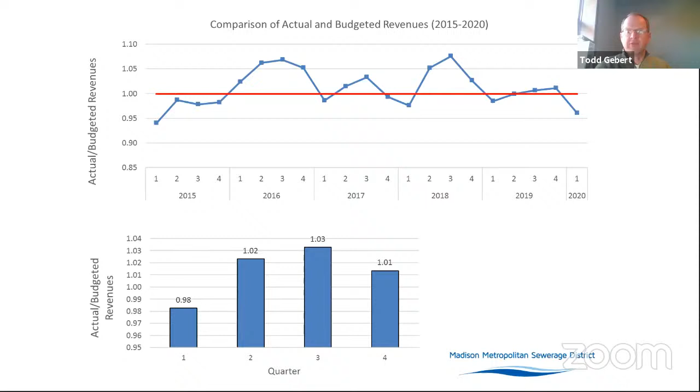That is somewhat rare for the first quarter of any given year, and that's illustrated in this slide, which basically shows over the last 5 years how our collections compare to the budgeted revenue. So in the first quarter, we're usually at about 98% of collections, and it kind of moves up to quarter three as our best quarter for revenues, then tails back down in the fourth quarter. So I think it's safe to say that if you're showing a surplus in the first quarter, you are probably going to show a surplus for the remainder of the year as well.

The main reason for this is, as you may recall, when we set rates for 2021, we didn't know the course of the pandemic at that time. Things were not in a very good place. So we assumed that loadings in 2021 would be very similar to 2020, notably quarters 2 and 3. We made pretty drastic reductions in loadings, and that results in the surpluses you see here because loadings have actually increased, and I'll get to that in a little bit.

The second story, of course, is volume is trending the other way as it normally does in the first quarter. We've had 6 months of pretty dry weather, so we're a little behind on volume so far.

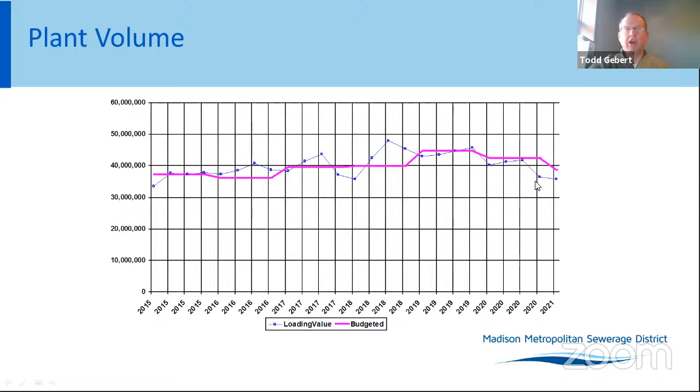So I mentioned volume, and here's the plot we show at rate setting every year. The magenta line is the budgeted flow rate that we're setting, and the blue dots are the actual flows. So you can see back in quarter 3, right here, when we set the budget, we dropped it 8%, and the flows have actually gone even lower than that since then.

One thing to note here is how we set the flow rate. There's a number of things we take into account, but one of them is for the next year, we try to set the flow rate about 2 million gallons per day higher than what we think it'll be in December.

Back in October of last year, we thought the flow would get down to about 38.5 MGD, so we set the budgeted flow rate for the next year at 40.7. You see it's dipped a little bit below that, but not horribly so.

The other thing to note here is that this is not unprecedented. Back in 2018, we had a similar low flow rate of 36.7 MGD. And of course we all know what happened in 2018 with the storms in August, that we actually had a surplus in volume for that year. So I think volume's in decent shape.

One final thing on this slide with respect to volume is you see the choppiness, and obviously that's a wet weather component, inflow and infiltration. You'll note the next item on the agenda is a talk about inflow and infiltration and how the district deals with that going forward. While the district doesn't have a huge problem with I&I, controlling that will help with billing, reducing some of the sensitivity in this volume parameter we've seen over the years. So that's setting the stage for the next agenda item.

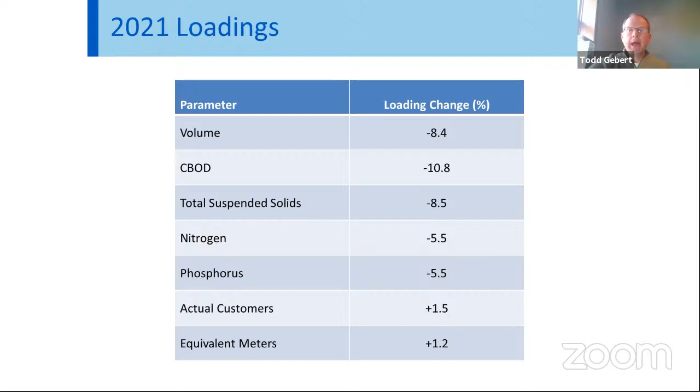Turning now more to the pollutant loadings, this is just a summary. Again, I noted the reductions we made in loading estimates from 2020 to 2021: volume 8%, CBOD 11%, solids 8.5%, and nitrogen and phosphorus both 5.5%. Those are pretty big swings.

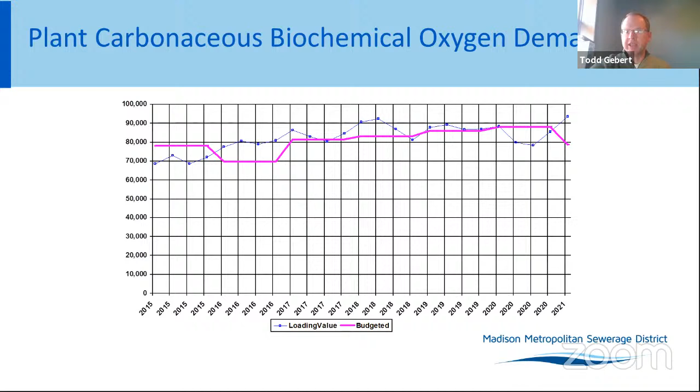You see a similar story for total solids, very much the same pattern. And even plant total phosphorus, which tends to be our most stable parameter with very little fluctuation quarter to quarter and year to year, even that has rebounded in quarter 4 and into quarter 1.

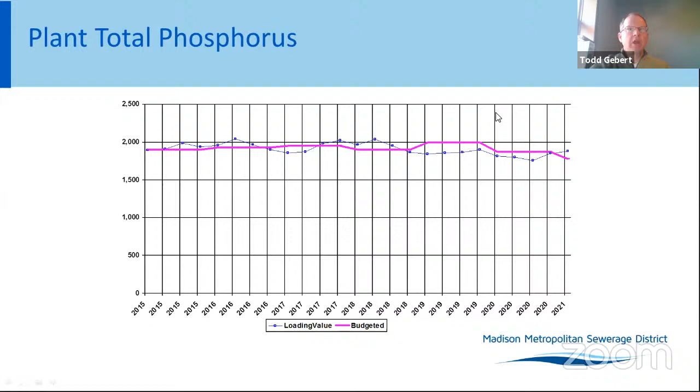So you might be asking, what's driving this, or where is it coming from? We didn't see this increase in any of our local monitoring points, the municipalities that we monitor. Just as a refresher, we monitor every customer except the city of Madison, which is figured out by difference, but we didn't see it in any of the customer communities. We do, however, monitor CBOD and other pollutants at the pump stations that pump to the plant.

Looking at that data, you see pump stations 8 and 11, the orange and red lines. These tend to be more residential in nature, the service areas. We saw very little fluctuation over the last 2 years in loadings to the plant, indicating the increases aren't coming from there, and there were no reductions either over the last year or so.

Compare that against pump station 2, located in downtown Madison, the western part of the isthmus. Lots of institutional and commercial uses in this basin, notably the UW-Madison campus. That's where we saw a lot of the drop last year. Very understandable, with less people on campus in the downtown area.

But where we're really seeing the increase now is in our pump station 7 and 18 service area. You see this climbing leg here from quarter 4 to quarter 1, almost 10,000 pounds per day. This is really the eastern part of our collection system, all the way from the Village of DeForest in the north down to the town of Pleasant Springs in the south. So where we think this is coming from is probably the city of Madison, some of their larger commercial and industrial users in that basin.

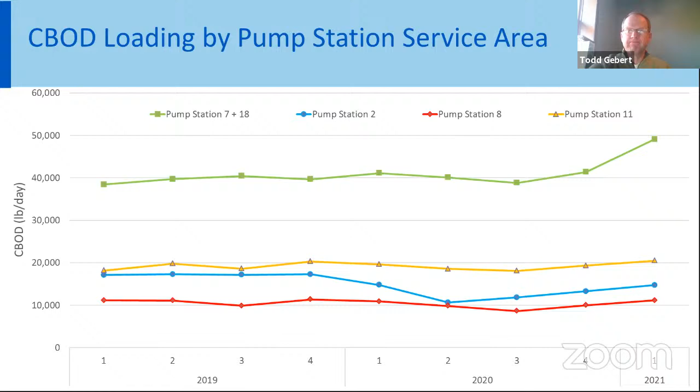This then is reflected in the city of Madison's bill. You can see that they're a little ahead of budget at 26.6% for the year, due to those increased pollutant loadings that we're seeing.

So that's all I have today for the bills. Our requested action today is that the commission approve the sewer service charges for the first quarter of 2021 through approval of resolution R7. I'd be happy to take any questions the commission may have on the service charges.

Okay, thank you, Todd. Anybody have any questions?

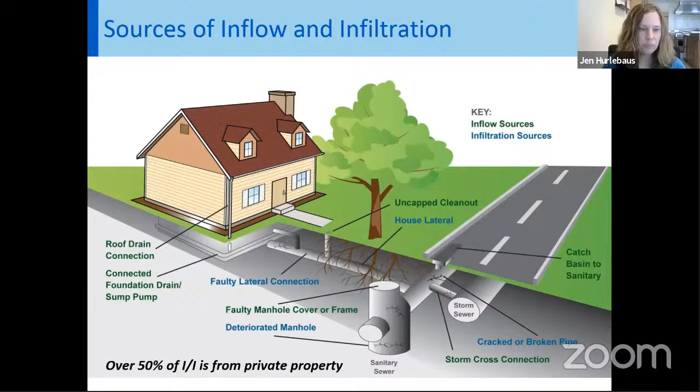We see some of this lower or longer response in areas that are near the lake too, when the lake levels were higher after that large storm event.

So the overall goal for the district's I&I program is to maintain the flow standards defined by the district's sewer use ordinance. Or more simply put, we want to reduce the peak flow to within 4 times the average daily flow.

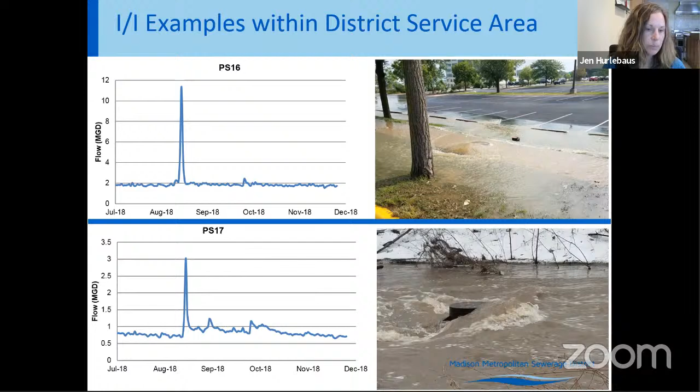Owner community meetings held in 2019 identified I&I reduction as a top priority for our communities. I&I reduction is included in the district's strategic plan and supports the commission outcome policies. Having a program focused on inflow and infiltration reduction builds owner confidence that wastewater is collected and treated in a manner that is consistently safe, reliable, efficient, environmentally responsible, and forward-thinking.

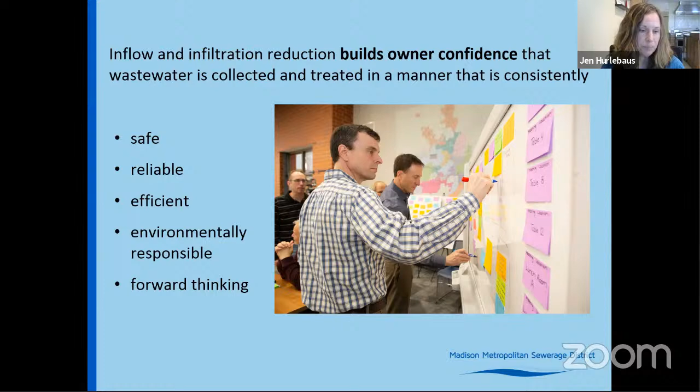I&I reduction also supports the Commission's reliability ideal established in the 2019 Commission strategic planning. More specifically, inflow and infiltration reduction provides value to the district and our owner communities by increasing resilience to changing weather patterns, deferring needs for capacity increases, improving system performance, and meeting regulatory requirements.

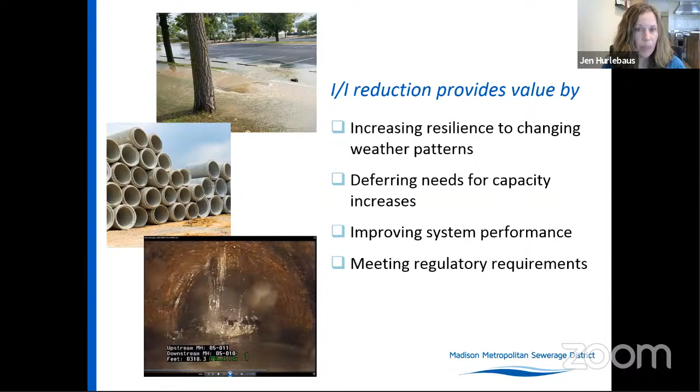So our first step for the program was to develop a program framework and implementation strategy. The district hired Brown and Caldwell in 2020, and the I&I reduction program plan was completed in March of 2021. Full report was included in the commission packet for your reference.

Very early into this project, we formed an advisory committee to help with developing the program framework. Members of the committee are Mark Motor, City of Madison; Theron Jacobson, City of Verona; Ben Kohlenbrook, Town of Dunn; Bob Anderson, Town of Westport; Jim Hessling, Village of McFarland; and Davis Clark, Village of Windsor.

We wanted to make sure we were having a panel that represented as much of our communities and interests. A city has different interests than a town does, or different challenges. So we were trying to make sure that we had a group that would help develop a program that will work for all of our owner communities.

The committee has met 6 times since January 2020. The first meeting was held in person, and we reviewed 6 II reduction programs throughout the United States, each with different approaches on how they address II reduction. When the pandemic sent us all home in March, we sent out a survey to keep the project moving.

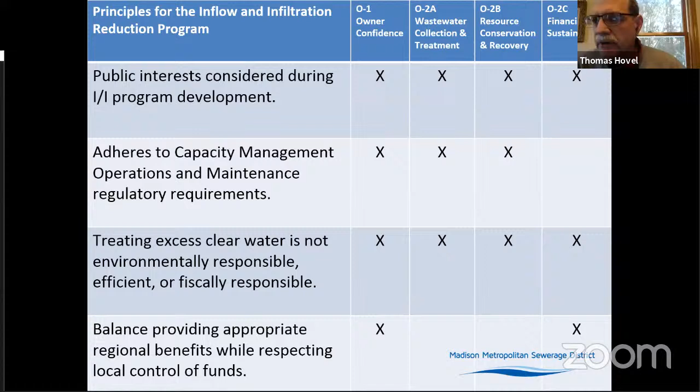Sure. So 2021 budget is what we have right now. We're going to try to do what we can this year to start the model updates and start developing guidance documents as we're working through some of the details of how this program might be implemented. Then 2022 is continuing into model update and flow monitoring plan. So we're still doing a lot of office work - a lot of desktop analysis at this point.

And then that capacity and cost effectiveness evaluation is dovetailing on the model results. So we're doing a lot of model simulation, working with Brown and Caldwell. Most likely I'm going to bring that engineering services to the next meeting.

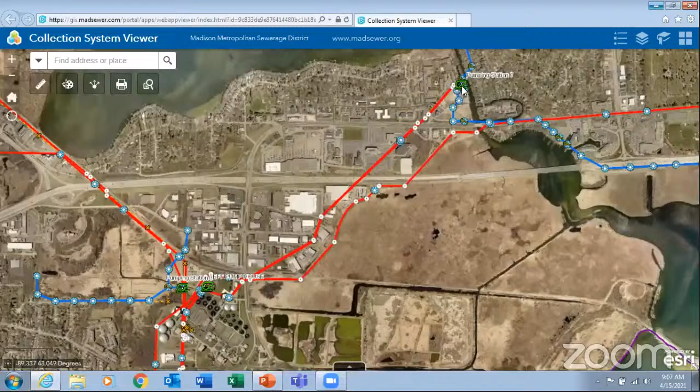Amanda, you can see everything. Does that look good, Michael? Yes, okay, looks good. This is our GIS system. So just to get everybody oriented, what we're talking about in general is our pumping station 7 force mains. This is the bottom of Lake Monona, the Yahara River. The belt line goes to the middle, this is Southtown Drive, and then the treatment plant. Pump station 7 is located on the Yahara River on Bridge Road. I'll see if I can zoom in here a little bit.

Right next to this used to be Jingles on the River. It's changed, it's a restaurant next door to us. We just rehabbed the station right on the corner of Bridge Road and the Yahara River.

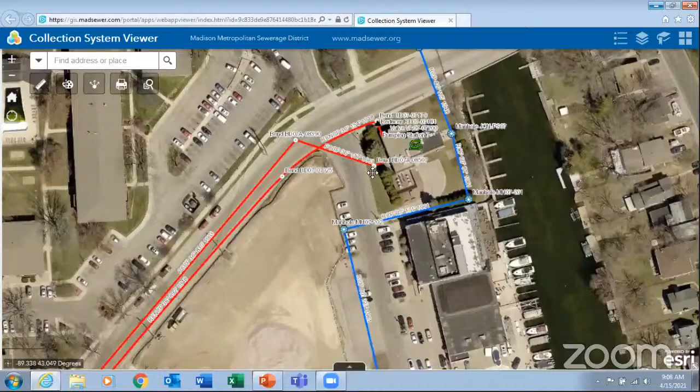Two force mains come out of the station, both 36-inch diameter. One was built in 1948 when the station was built, and one was built in 1963. Most of the time, both force mains are in service.

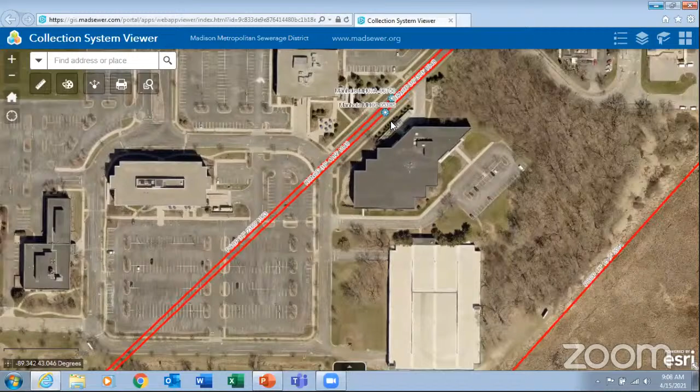They run side by side all the way up Bridge Road, cross the old belt line, which is now Broadway, go through the WPS campus, and then cross the belt line. They actually run underneath the First Supply Building. There's a long history with that. None of this was here when the force mains were built, and all this was built over us.

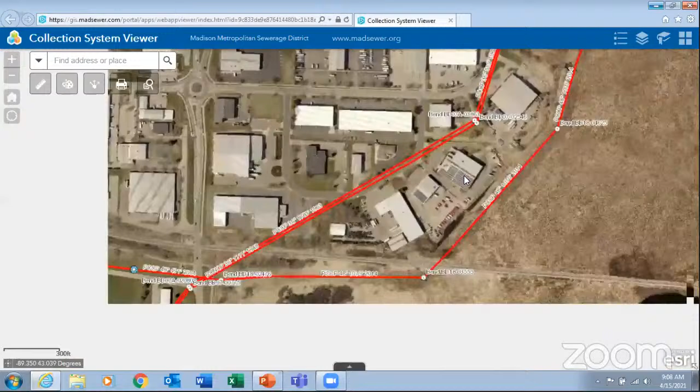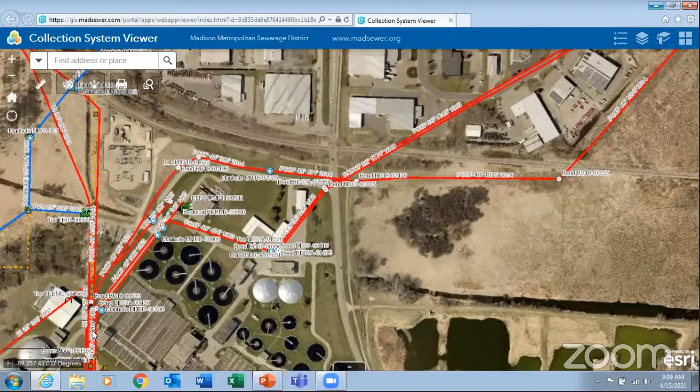But again, they're side by side, the two pipes, until they get to the treatment plant, cross the railroad tracks, and then join into one pipe on the campus here at the treatment plant grounds. They become one 48-inch pipe that goes up to and discharges to the headworks building.

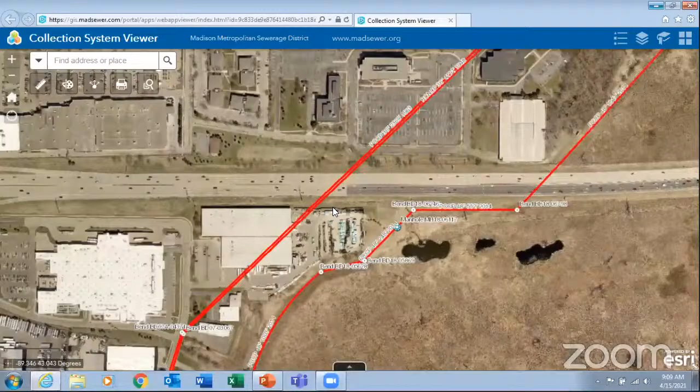Where we're seeing this leak is in the median of the belt line. Specifically, this is First Supply's boneyard, if you will, where they're doing this flex lane work, removing the concrete in the middle of the road there.

Everybody's driven the belt line and seen that most of the work is at night, but I will switch - the leak is right in the middle of the belt line, and it's just in general very difficult to get there. You can't even really get there during the day.

We have to have the sheriff stop traffic just to get personnel out there. It's just a difficult spot and a very high risk spot in general. If we had any sort of problems, the consequence of failure in this area is very, very high, as you can imagine.

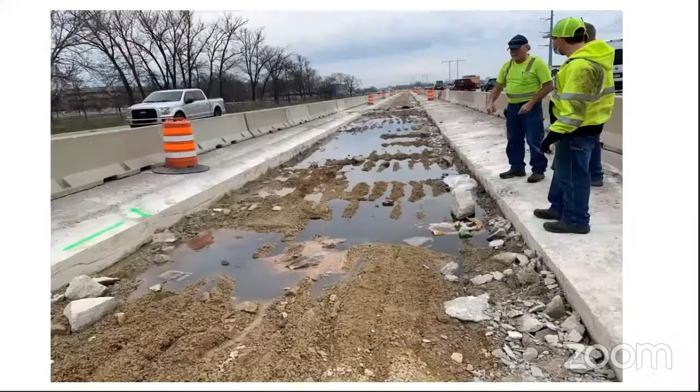This is what it looked like last Monday. Ray and his crew are out there. This had been dry. Again, you can see they took out about 12 feet of pavement here, sawed it out, and then busted and rubbleized the concrete. It hadn't rained as of last Monday.

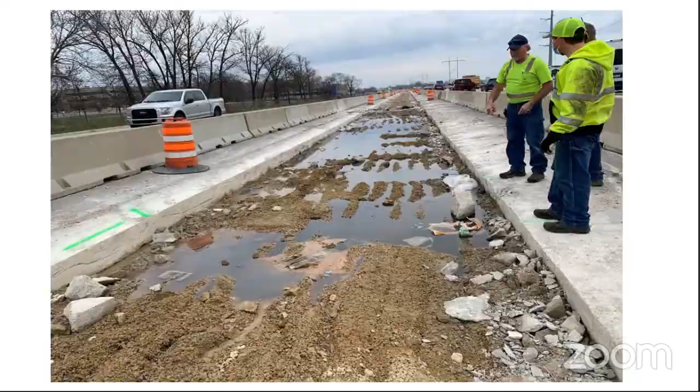We had all that rain last week, but this is before the rain, so you can kind of see what it looked like. This smelt like, looked like, and we tested it - it was raw wastewater. You can see how it boils up, was boiling out, not excessive or anything like that.

It took some sand with it, but in general it was just being trapped in this area. There was a little pile of gravel down here, so none of this water that leaked out made it to the surface waters, to the lakes or anything. It just boiled out here and then almost infiltrated back in as it went down and was traveling this way.

So we reported this, we estimated it at 1,500 gallons, and that was basically a length, a width, and a depth, but none of it made it to the surface waters. Ray and his crews have been monitoring it daily, and monitored it after this and looked at where the storm sewers exited and did not see any evidence that it made it to the storm or to the lakes or anything.

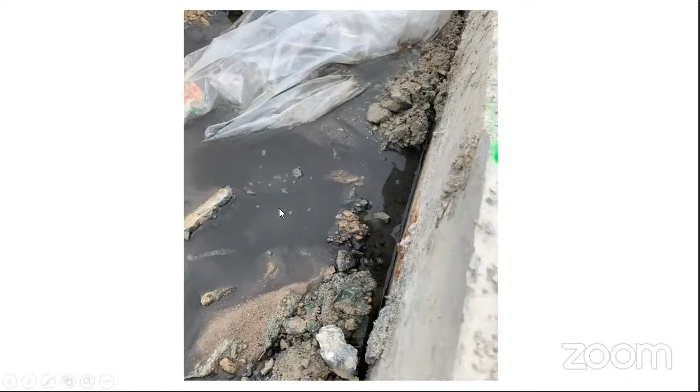So what we did was we turned off the pump station, and the water stopped, which we expected. Again, these are just - it boiled out in different spots. You can see it bubbling here. Here's another picture of that where it was boiling out, and it makes us just very nervous.

We don't know if it's right in this location. This is where it's boiling out, but it could be underneath the lane of traffic. We just don't know how water travels underground. And again, if there were problems on the belt line, the consequences are high in a hurry.

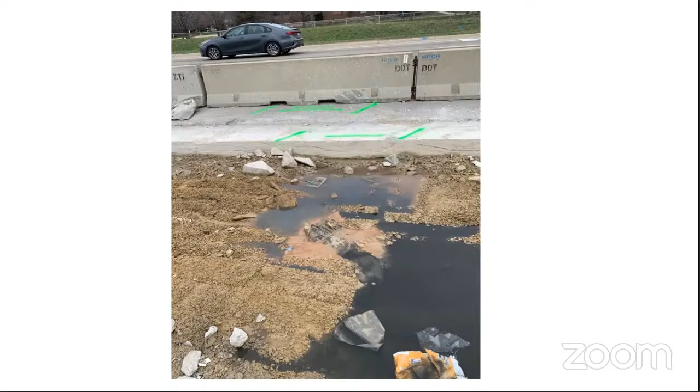So these are all pictures of last Monday. Since last Monday, we had it off for a day or two, and then we said, well, we've got to figure out which force main it is - is it the 1948 force main? They're both reinforced concrete force mains, and we're trying to determine which one it was. Since last Monday, we've been going from one force main to the other, trying to get more flow, run more pumps through that station, and the water hasn't surfaced again.

This is where the leak was. You can kind of see it here. This is where the leak itself was.

And it hasn't surfaced again. Now, the water may be staying subsurface.

The pipe is about 7 or 8 feet down. And when the belt line was built, there was nothing here when those force mains were installed, it was a cornfield and an airport.

When the belt line was built, the DOT put a concrete cap over both of the force mains, and that makes the situation almost worse because we don't know where the leak could be. The leak could be running underneath the cap. The cap doesn't go all the way around the pipe, only to the center line, so we don't know. That makes the problem worse.

And then if we dig down here, we've got to bust out the concrete. If the leak was in this magical 12-foot width, we'd have to bust out the concrete, and likely that could damage the pipe even more.

So what we're thinking right now is, again, we have the redundancy, we have the ability to manage the flow. We have station 18, we can always divert flow to station 18. We did that last Monday when we shut it off. So the flow we have in control.

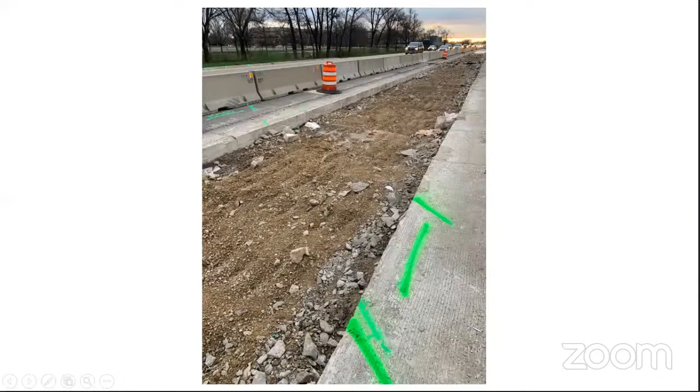We would have to do it at night. But the plan right now, this concrete cap runs from fence line to fence line, about 300 feet. The plan is to excavate on either side of that, outside of the road, and line these one at a time.

It's a special liner, a pressure liner. It's different than when you line gravity sewers, it's a different animal. It's got some fiberglass in it, the resin is different, but that's going to be the next steps most likely.

And it'll take likely weeks, several weeks, if not several months, to do these, to line these. And in general, I think it's a good practice at this point to do it.

The old force main is from 1948, it's over 70 years old already. To just leave it or try to patch it even in the median, if we could magically find it there, I think it would be better to just in general line the whole thing under the belt line. The consequences are just too high in this area.

So that's what our plan is. And as Michael said, I've engaged with several contractors about excavating pits on the side of the roads and starting to get the materials and do this. So this will be ongoing for several weeks, if not maybe even several months.

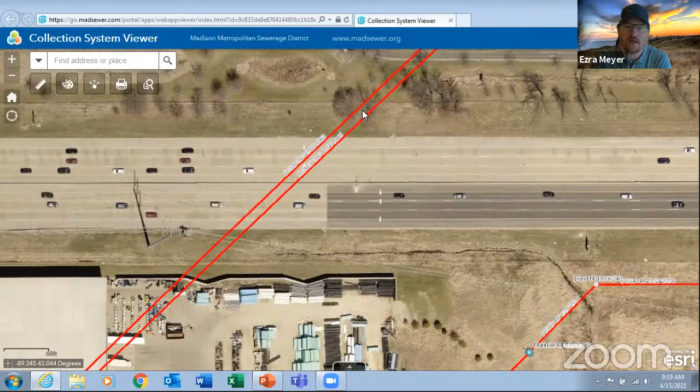Ezra, that makes sense. And the second thing I was going to ask is, when otherwise were we maybe going to come around to lining these force mains between this pumping station and the plant? Did you have that on the horizon in the CIP, or would that otherwise have been even farther down, where it wasn't even programmed yet? What do you think?

Yeah, it's not programmed yet. We're just in the infancy of our force main inspection program. We just started it up and tried to inspect these. They're difficult to inspect in general. When we did what we did in 2019, we sent a special SmartBall through the pipe and obtained GPS locations, but more importantly, to look for leaks acoustically. We didn't find any, like I said, but didn't really look at the pipe structurally. To look at them structurally, that's an order of magnitude difference.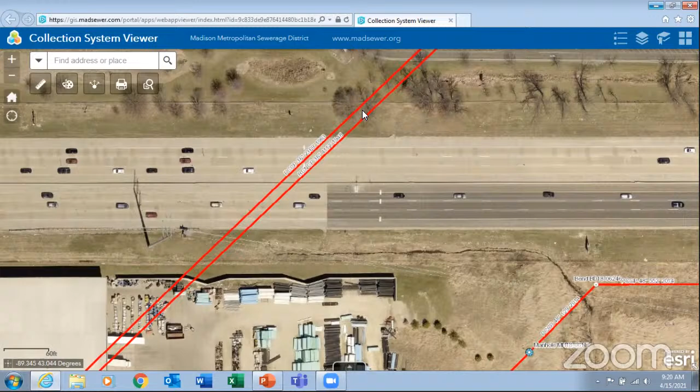And it's a great question. Maybe at some point some of these force mains, we should just start programming them to be lined just like a lot of our interceptors, especially in critical spots like this. If it's, to be honest with you, if this was in WPS's parking lot up here, it's probably not the end of the world. I mean, yeah, it's not good, don't get me wrong, but here in the middle of the belt line is a different animal. So it's a great question, and I think maybe something that Todd and I and Jen should talk about, or the team in general, is that maybe we should start programming some of these force mains to get them lined or replaced.

But they do pressure linings for water mains all the time. We have not done one like this for a force main, but it is available. But that's a great question.

Thanks, since Bruce, we have not been able to isolate, I'm a structural engineer, and what got my concern up very quickly on this, and I haven't been getting much sleep, is the belt line is a reinforced concrete pavement. It's a rigid pavement, so it has a tendency to bridge cavities for a long time until they catastrophically break, versus asphalt, which is a flexible pavement, which sags over time and gives you a little warning that things are getting bad. And this area could be undermining for a long period of time. And that's why the ground penetrating radar may give us some answers.

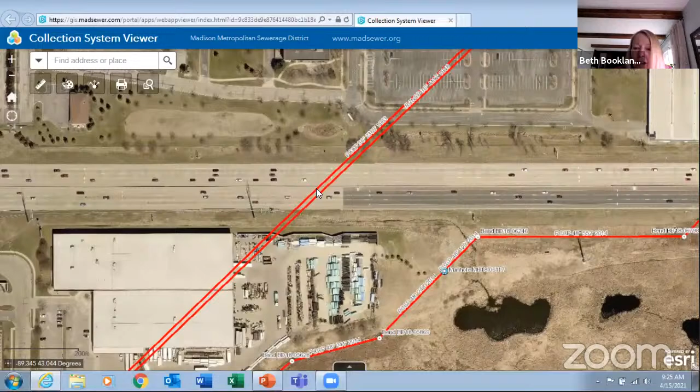Beth, you've got your hand up. Yeah, it just leads me to wonder - the fact that we found this digging up through the belt line, and this has probably been going on we don't know how long. We've got pipes underneath buildings, underneath parking lots, underneath other things, and these pipes are pretty old. So this leads me to think that there may be other leaks happening that we have no idea of either. So thinking longer term, I think we need to start thinking about replacing or lining these pipes in the future. I think this might be a sign of other things we need to keep track of and be aware of.

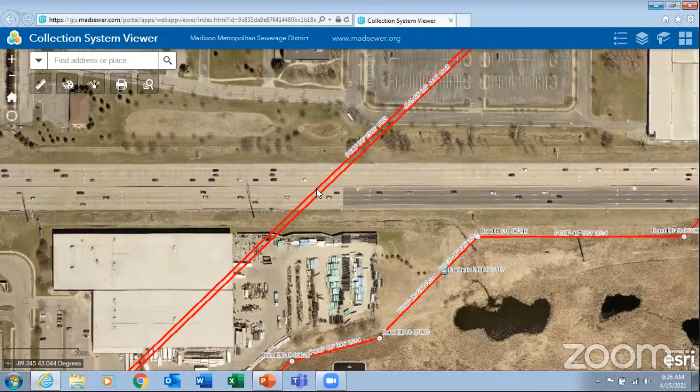Agreed. Again, if nothing else, maybe we need to ramp up our inspection program more. We have started it, but if you really want to get into structurally looking at these, I think we have $100,000 budgeted - that isn't going to get it done. But great comments in general.

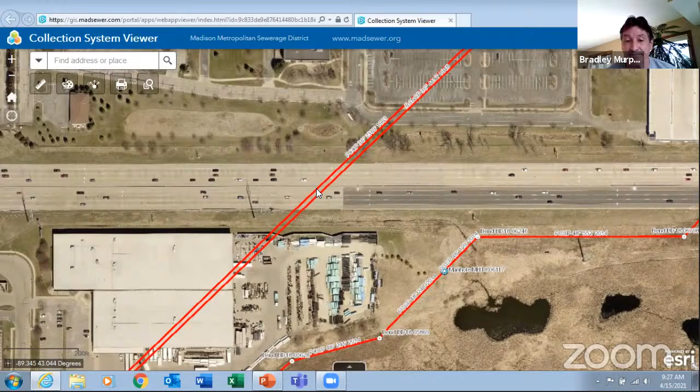Okay, Brad. I appreciate the update, and I'm assuming you've discussed this with Attorney Kent and that he's comfortable with the approach you've taken to negotiate with one consultant contractor to get the work done. And assuming you have the authority to proceed as you've described, I'm fully in support of that, and I would echo Tom's comments that we should maybe put this on the next agenda so we can actually have a discussion and get an update on what's going on. So thank you very much. You bet, okay, thank you Brad.

Thank you for all the comments or questions to Bruce. Yeah Michael, it's not a bad idea to have it on the next agenda item. And I think you had the authorization to allow for emergency use. So thank you for bringing that to our attention. I'm done.

Paul, you have the regulatory and legal review? Yes, and first I apologize for not getting a written report to you. I will have that at our next commission meeting. But there hasn't been a lot that's changed, just a couple of things I'd like to highlight.

One, we noted in our last update that there was this disinfection guidance that the department had issued, and it raised many of the same issues we talked about in the context of our permit, being now raised statewide. There were a number of comments submitted in response to that proposed guidance. We found out yesterday that based on those comments, the guidance has been pulled and there's no timetable for when they'll revisit it. So at least for right now, that's off the table. I would suspect that now that that's off the table, there may be a final resolution to our permit issue, because I think that guidance may have complicated a few things. So we'll look for that. I think we reported last time that we finally have some labs certified for wastewater sampling for PFAS.